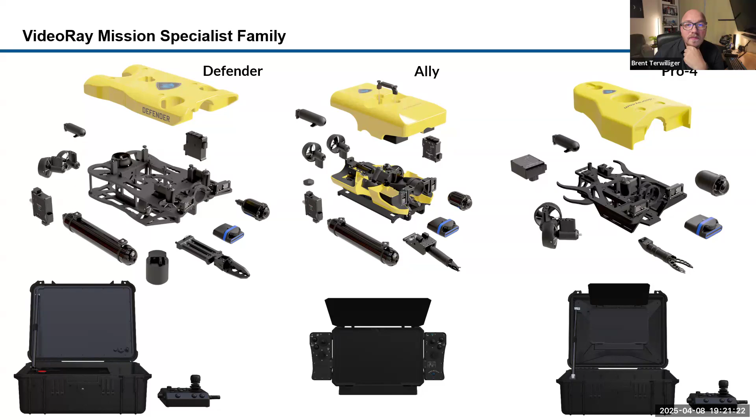So I've talked a lot about modular missions. We call it mission specialist in the company - that modular ability to move components across all our vehicle lines. On the left, we've got some great pictures showing the modular manipulator sets, which are articulated arms. It looks pretty beefy, but the actual arm mechanics are fairly small. What you're seeing there is actually syntactic foam.

That foam provides flotation to offset the weight of the mechanical arms. One interesting thing about the vehicles is that as the arms are extended, the center of balance changes, so the pose the vehicle assumes as the arms move through their motion changes too. It's a really interesting dynamics problem, because if you reach out to pick up something heavy, the aft end of your vehicle will float and the front end will sink. So how do we maneuver the vehicle in that strange orientation? We've had to build a unique 6 degree of freedom controller so the vehicle can fly in these unusual attitudes when it's manipulating, lifting, or pulling various objects.

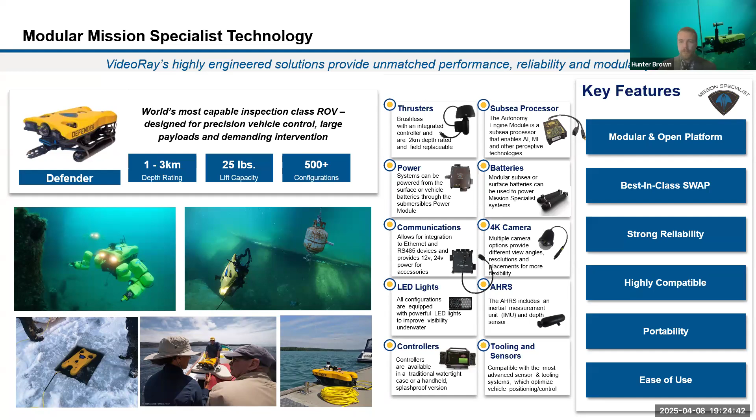The flotation we use is called syntactic foam, probably not well known in the aviation industry. It's essentially a closed cell foam injected with glass microspheres, and those glass microspheres don't get crushed the deeper you go. Whereas with another foam, say styrofoam, which is an open cell foam, those air pockets tend to crush. If you've ever seen deep submersibles like Alvin from Woods Hole diving down, sometimes they'll take a styrofoam cup down, and when it comes back up it's about 1 inch tall. It's really exciting to see those demonstrations, and a fun souvenir from the dives.

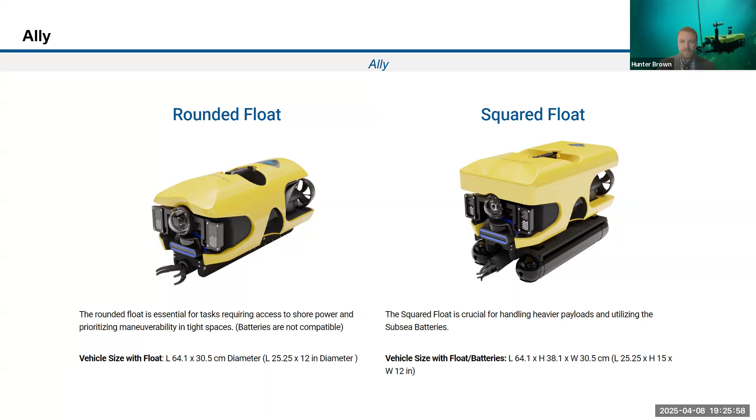Haha, I'm giving away the secrets here.

This vehicle has 10 thrusters, 4 situated in the aft. We've also added our 6 degree of freedom software so it can fly in any attitude. The front end of the vehicle rotates, so you can point or aim your sensors towards your target of interest.

You can imagine swimming along looking forward is great, but what if you're interested in something on the seabed? You can rotate that entire center section to point directly down or up as well. An application where you point it up might be performing a ship hull survey - you're interested in the condition of your hull, whether anything is attached that shouldn't be, or inspecting for mechanical damage if there's been a collision.

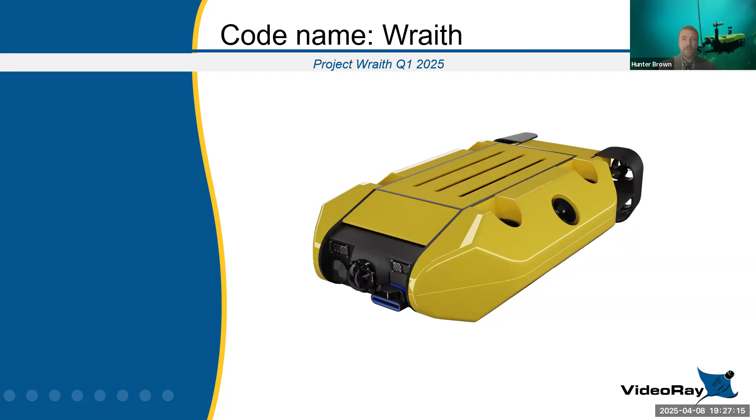This is going to usher in a number of new opportunities for both VideoRay and our customers. We're very excited about this. As I mentioned before, WRAITH can host a payload and be used for a number of different applications.

We're going to skip ahead. As I mentioned before, about 2/3 of our sales are government, Navy addressed. And we recently won what's called a program of record, the Maritime Expeditionary Standoff Response Contract, about $90 million, to perform mine countermeasures activities and neutralization activities.

What does that mean? In lots of places around the world, they have a problem with derelict mining from previous conflict, and they have to have a way to neutralize those mines to open shipping lanes and provide safe passage for commercial, recreational, and Navy vessels. After identifying the location of these mines, they need to go remediate them, either recover them and make them safe or neutralize them in place.

The VideoRay ROVs, undersea systems, are the vehicle of choice for a number of different navies. We offer lots of different options to accomplish those feats, such as grabbing on with a gripper at the end of a manipulator for recovery, and cutting tools so mooring lines and tethers can be cut.

We also offer neutralization packages that use kinetics to essentially work as a can opener - peeling open the mine, letting it flood, neutralizing it, and sinking it. At the same time, this doesn't cause the mine to go high order and set off, giving away a position. So lots of options there. We're real excited to support those demining activities around the world.

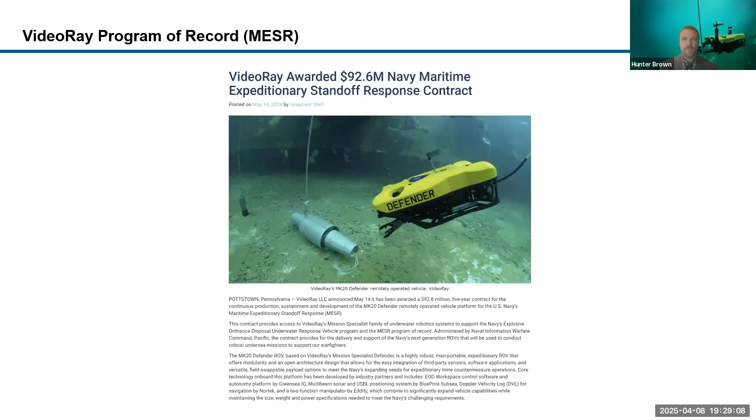The MESR program is a family of systems. We're constantly upgrading the vehicles with new software, new mechanical capabilities, new depth capabilities, and passing those on to our customers around the world. We're very excited, both within the United States Navy and other government, commercial, and academic customers around the world.

That is being overcome slowly across the industry. We have a lot of precedents we can point to with the aviation industry, looking at the success stories there to translate into maritime. Unfortunately, maritime tends to add a zero, or two or three zeros, to our similar friends above the sea surface projects. So it's a little more challenging sometimes to get in with new customers than perhaps some of the smaller UAS systems.

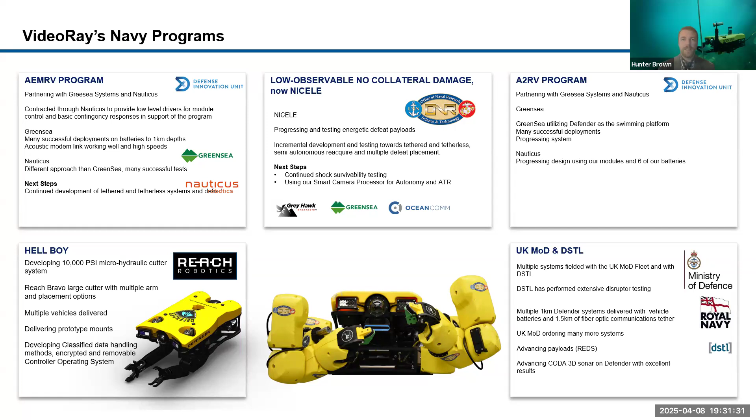I'm here at Sea Air Space Convention this week in Washington, D.C. at the National Harbor, talking with the navies from Chile, Japan, Canada, and Lithuania. Really, it's truly a global market these days, and we've got to be prepared with products, training, and partners in place to help integrate these products into their teams, not only technologically but culturally as well. So we're real excited about this.

Looking ahead, we've got a number of opportunities to enhance our technologies. We've got obviously the special purpose vehicles. Generally, those tend to go into the Navy. I'm not going to talk too much about that.

Folks are always interested in launch and recovery systems and tether management systems. If you've ever tried deploying a lift bag undersea when diving and let slack get into that line, it immediately becomes a rat's nest, entangled with itself, and a real hassle. Sometimes you have to cut it loose and use a backup, and other times you just sit there and work through the tangles. It takes a long time, it's really annoying, and can jeopardize the missions. So it's critical to manage that tension in the tether throughout the mission as well.

You see novel flyout and deployment solutions with a number of different host platforms, everything from subsea vehicles like submarines to very large surface vessels as well. And they all have their challenges.

So for surface vessels, a number of our operators use small boats. They go out, they don't have a lot of room on the deck. In fact, there may not really be much of a deck to speak of, so they've got limited space. They may have a limited number of crew that can manage the systems. And then getting the vehicle in and out of the water might be a bit of a challenge due to the riding moments of the boat and the vessel.

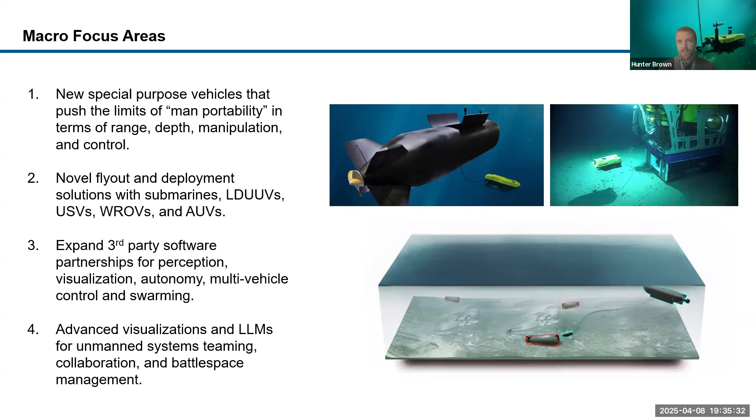When I was young, I took a tour of a company called Remotec that built tracked land vehicles, and was asked to pick up a grenade using a manipulator arm. They only had one camera, and it was quite frustrating the times I missed grabbing the grenade because you just don't get the depth perception. So we're looking into adding multiple cameras and providing novel visualization tools to give our operators that three-dimensional perspective.

I'm just going to skip through a couple things. This is, again, special manipulation. On the right, you see we've got two arms, articulated arms, recovering a box there. It's conveniently got some nice handles to grab onto, so that was very nice and considerate of whoever left that box for recovery.

On the left side, you see we're attaching a carabiner with a line to another handle. Perhaps that's to mark the location, perhaps it's to attach an acoustic beacon that can ping away for later relocalization, or perhaps it's connected to a buoy that will float up to the surface and mark that location. So lots of different options. Those black foam members you see on top of that left vehicle are additional foam based on the arms, the mechanical arms.

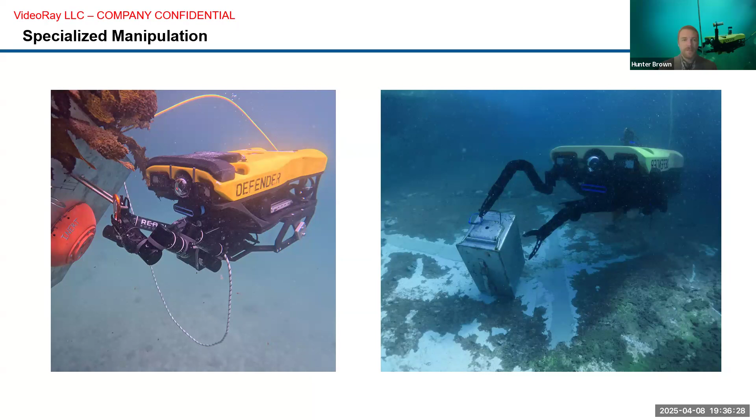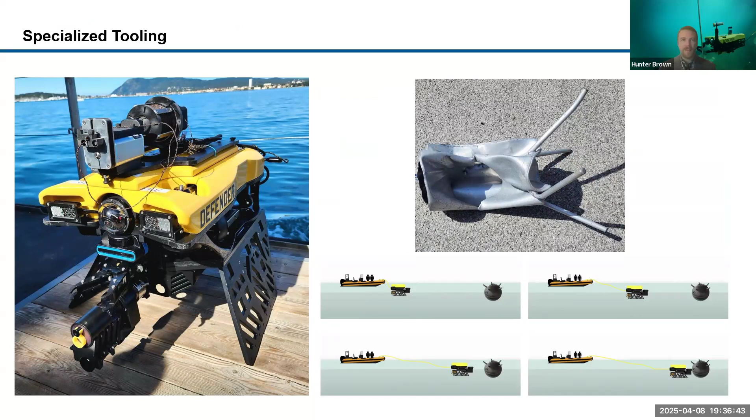We offer all kinds of specialized tooling. What you see here is mine neutralization tooling. Often third parties develop that and then work with us to tightly integrate it into the Defender system.

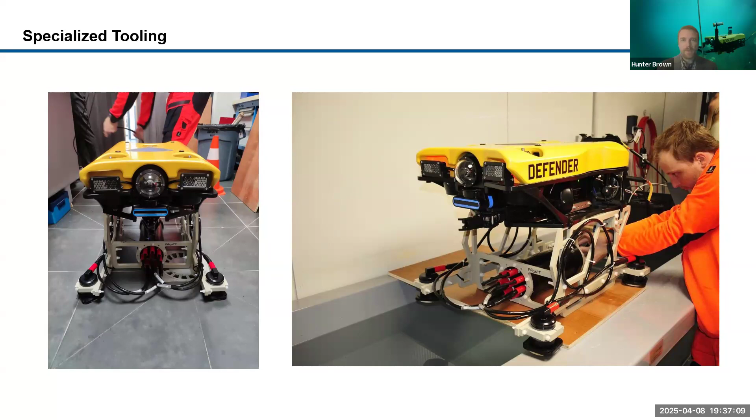Again, more specialized tooling. You can build custom sleds, skids, and integrate your own sensors, including a number of various off-the-shelf commercially available sensors. We speak RS-485, like I mentioned, and Ethernet throughout the vehicle.

And we can certainly effect custom communication schemes if you're interested in that. Here are some data products on the right-hand side. These are three-dimensional products that offer various accuracies and precisions. On the top, you see a pipeline survey.

In true acoustic fashion, you'll see some dark areas behind the pipeline, and the reason for that is called acoustic shadowing. Just as if you turned off the lights in your room, picked up a flashlight, and shone it around the room, it would cast various shadows. This makes it very difficult for automated target recognition systems.

The reason is that if you imagine a cylinder, if you shine a flashlight from one end, it would cast a circular shadow. Now if you move the flashlight to the midpoint of the cylinder and shine it, it looks like a rectangle. So with your acoustic image, you really don't have a good idea unless you fly the vehicle around the object and minimize those acoustic shadows to get a really nice picture of what you're looking at.

On the bottom, you see a shipwreck, and you can see it in relief view. Again, that's a three-dimensional data product, most likely created with what's called an interferometric bathymetric system, or bathymetry system.

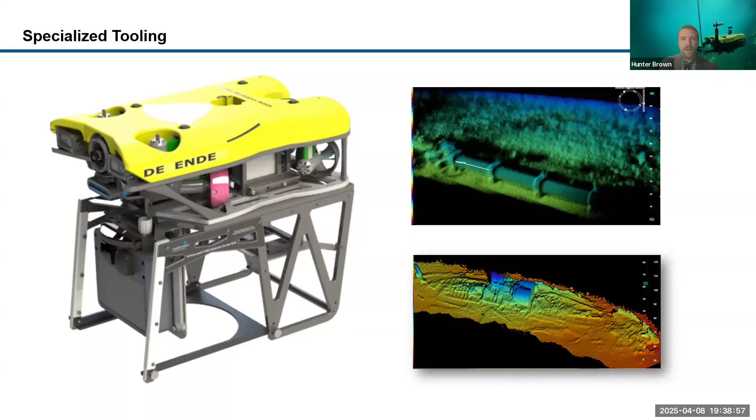It sends out a number of acoustic pulses, and based on the time it takes for those signals to move from the transmitter out to the object, reflect off the object, and return to the receiver, we can actually build very precise models of the seafloor and the pelagic spaces, if there's something in that mid-water column we're interested in seeing.

Here are a couple other data products available. This is a forward-looking sonar. We generated some 3D maps. It's really cool - you see some color highlighting, and the objects really stand out from the seafloor. This makes real-time operation by human operators much easier than if it was traditional optical-based or previously side-scan sonar based.

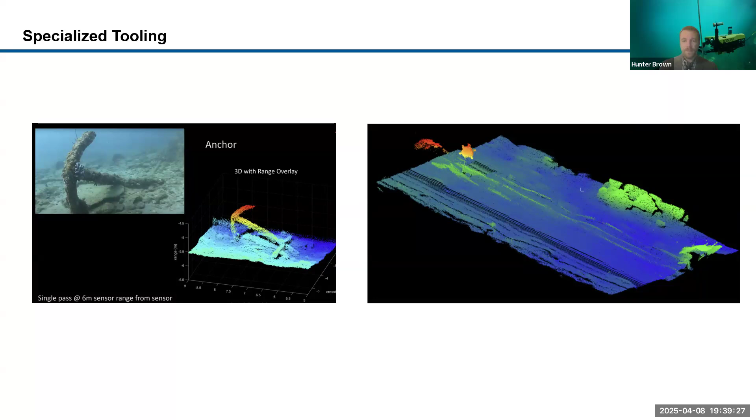Where are we working on innovation? It's not just one place - it's across the board. Camera technology is improving all the time. We want the latest and greatest on our vehicles, and customers demand it. We've got new vehicles coming out through the pipeline - smaller, larger, special form factors. You name it, we're thinking about it. And if we're not thinking about it, we'd love to hear your ideas as well about where we can go from here.

The human machine interface and the control systems is a tremendous opportunity, an area for innovation. I mentioned before the virtual reality headsets, augmented reality headsets. They're great when you're sitting in your living room looking around and playing a game. I must admit, I love being on the water, but as I'm getting older, I'm finding I'm growing more and more prone to motion sickness.

My daughter has a roller coaster game she loves playing in virtual reality. I found I can no longer play that game. Same thing happens at sea - you can imagine an operator sitting in a chair on a deck that's rolling and pitching and heaving, then donning a virtual reality headset and experiencing totally different motions visually as the vehicle at depth is being acted upon by currents. It's a challenging problem that we hope some innovative person, perhaps one of you, will come up with a great solution, and I hope you do.

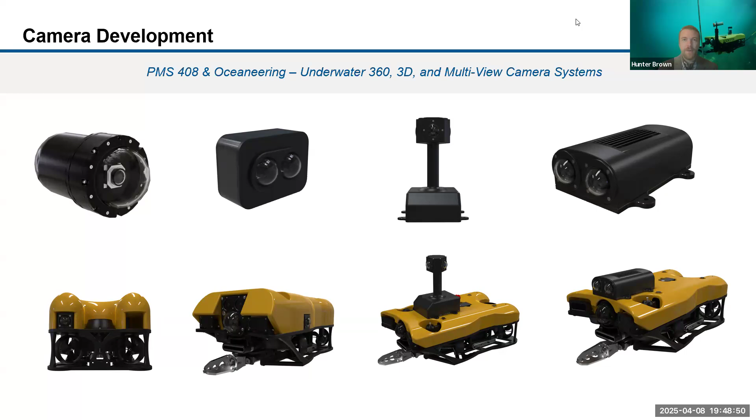A lot of our customers are really excited about that capability, and it's coming faster than we're expecting. So a lot of new technology is being thrust into the undersea domain all the time.

This is a boring slide. Let's move on. We're also working with other platforms, some rather large subsea platforms. We're working on mixed reality.

So we have a project right now with the Office of Naval Research on multimodal input to control heterogeneous assets. Those are big fancy words to essentially mean sometimes operators want to speak their commands into a headset, and the vehicles then respond to those spoken words. Sometimes they aren't in a position where they can verbalize words and they want to use hand signals, so they can effectively use sign language, and cameras in the headsets pick up those signs and then translate them into messages for the vehicles.

Sometimes they want to push buttons. Sometimes they want to actually grab a controller and steer a vehicle around. This also offers those operators the ability to control multiple vehicles across domains.

So at the same time, they might be issuing high-level commands to a UAS, for example, to orbit an approaching cruise ship and image the deck and get a good idea of what's going on above water with this ship. And then at the same time, they might issue commands to an undersea vehicle to orbit subsurface and inspect the hull. Is there anything attached to that hull that shouldn't be there? Is there anything attached to that hull that could cause damage to the ship or the port or harbor or dock that it's headed for?

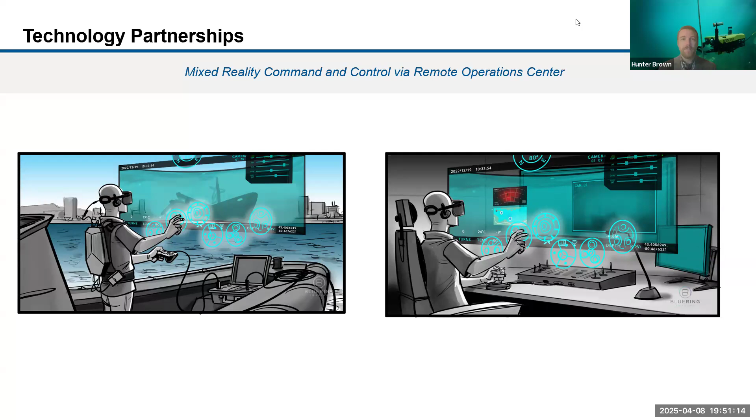So this system will allow the operators to effect all of those different types of commands, and at the same time translating the operator's intent to the specific proprietary message formats and protocols needed for the end asset. You can imagine an undersea vehicle, for example, needs an acoustic modem to talk with, whereas a UAS can use an RF modem. So our system, it's called Mismatch, connects the operator using a common vocabulary to all of these different endpoint robotic systems. So it makes it really easy, compact, and the operator doesn't need to carry 10,000 different communication systems and control systems and learn and be trained on all those systems. They only need one. So we're real excited about that and where it's headed in the future.

Here's just a sampling of images with some different configurations, lots of different technologies, always exploring, always looking at what else can we do as VideoRay to help our customers achieve their goals. And that's really a trending theme across all the different teams within VideoRay: what can we do better? What can we make easier on our customers? Is it putting arrows that point to different things on the system so it's easier to assemble? Is it in software?

Is it making a button a little bit bigger so that if you're on that pitching, rolling, heaving deck, it's easier to press that button? Is it audio alarms and bells to alert operators of specific conditions on the boat?

Personally, when I was first starting out going through my flight training, I realized that when I was task loaded, I turned off my ears. I did not listen to what my flight instructor was telling me. I did not listen to audio alarms. I was totally visually focused on the dashboard, thinking what are my gauges telling me? It took me a while to get over that.

But I realized, after going through a number of different virtual reality trainings, our users do the same thing. We spent a lot of effort building some very cool simulation products with audible alarms and voiceovers for different sections. After taking off the headset, we asked customers, hey, what do you think of that instruction or that alarm? They literally came back and said, what alarm, what instruction? We didn't hear anything. That's been a really interesting lesson we've learned in ergonomics. How do we help our customers learn as fast as possible and become as proficient as possible without extra information and undue complications and distractions.

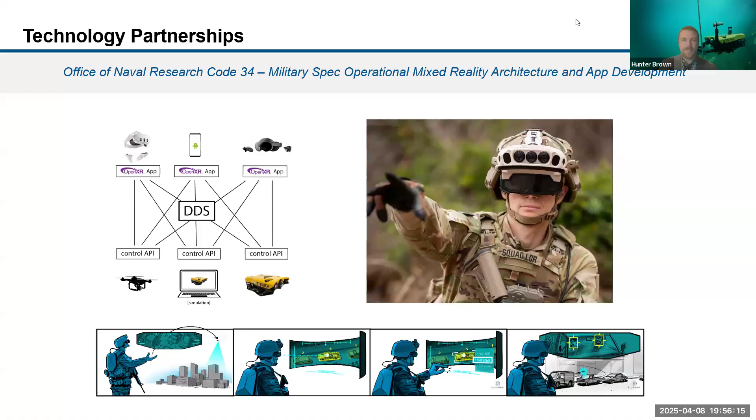Similarly, we're also using AI to scour our manuals, user manuals, so that in the field, instead of having to flip through a manual to find a section on how to accomplish a certain task, you can verbally ask, hey, essentially, how do I do this? And the AI systems will have that knowledge and awareness of our manuals and can respond intelligently.

We certainly have lots of testing to go, and as we're all learning now, these AI systems or large language models are prone to hallucinations, and that's unacceptable. Some of our customers have very specific missions, and if they need information, that information has to be 100% correct.

Similarly, I imagine in the aviation world, for manned crewed aircraft and passenger aircraft, similar situation. We're not in a place yet where we can rely on these AI systems to guarantee passenger safety. So we've got some work across the industries there, but it's approaching faster and faster with every day. Really excited about where it's headed. Lots of opportunities. We're just not quite there yet, but we will get there.